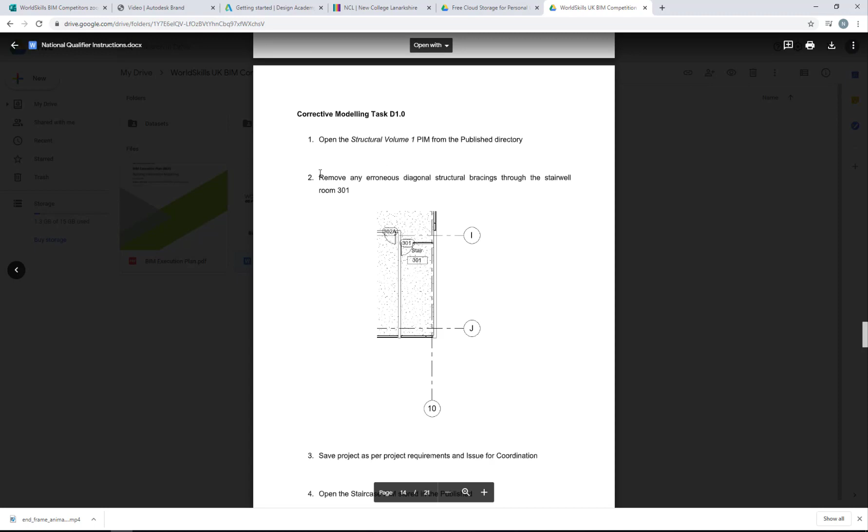In this video, I'll show you how to complete a staircase based on a provided sketch. The corrective modelling task D5 says: delete the staircase and create a new one using the dimensions as per the exhibit below.

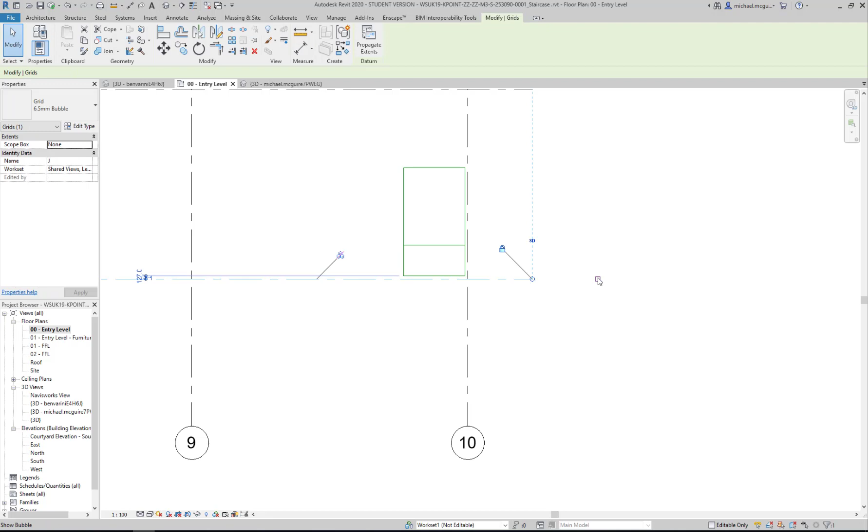Having opened up the model, we can check the grid lines here. Let's switch on the identifier bubble for the grid line. So this is J10, and we can see that in the instructions, at the intersection of grids J10.

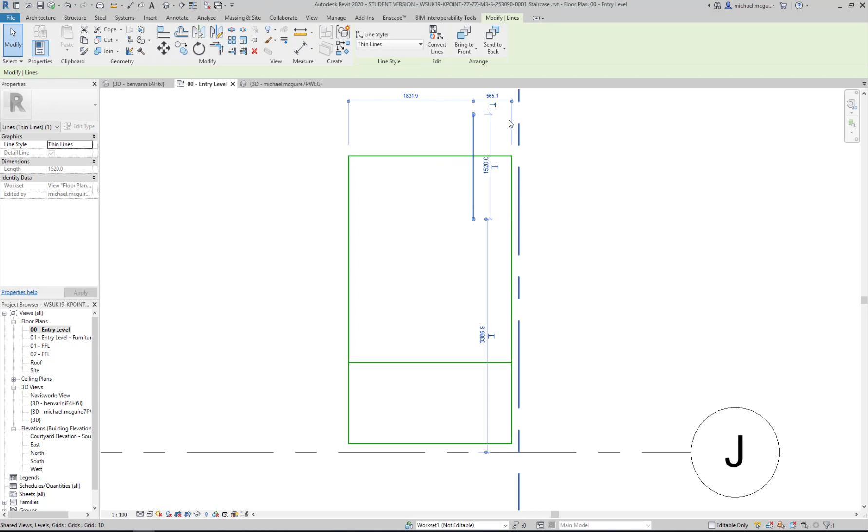I've got a little sketch to create here, and I've already created that using either reference planes or the lines tool. We can say annotate, detail line, and draw in some lines, or use the model line tools. Clicking on that gives us the dimensions out to the grid lines.

One thing we see within Revit quite a lot: if I click this line I've drawn, I can go back to the sketch and see from grid line 10 to that line it's 102 millimeters. If I jump into Revit and click on that, we can edit this dimension here, which would force it to be 102.

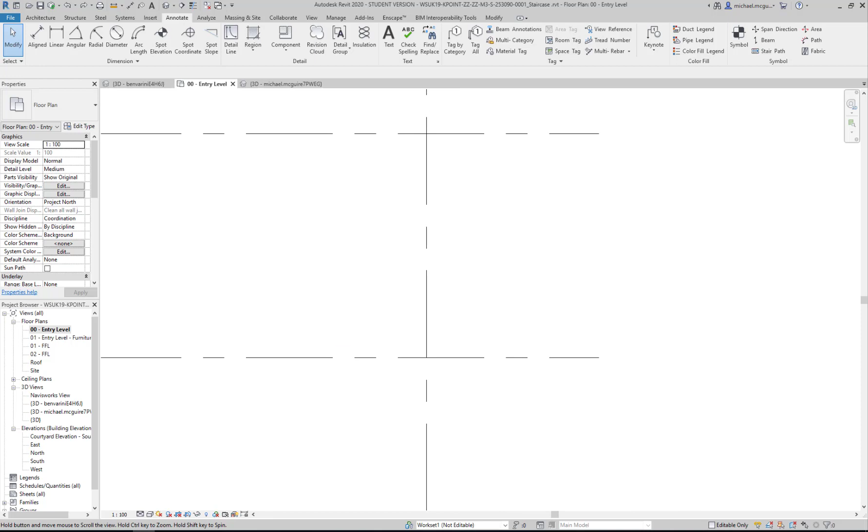But what if we had this line here and wanted to know the dimension out to the grid line? It gives us this vertical line to the next vertical line. If I pan down and click on that, Revit nicely ignores any vertical lines that are out of the screen. So if that were 700 millimeters, for example, we'd be able to dimension to that.

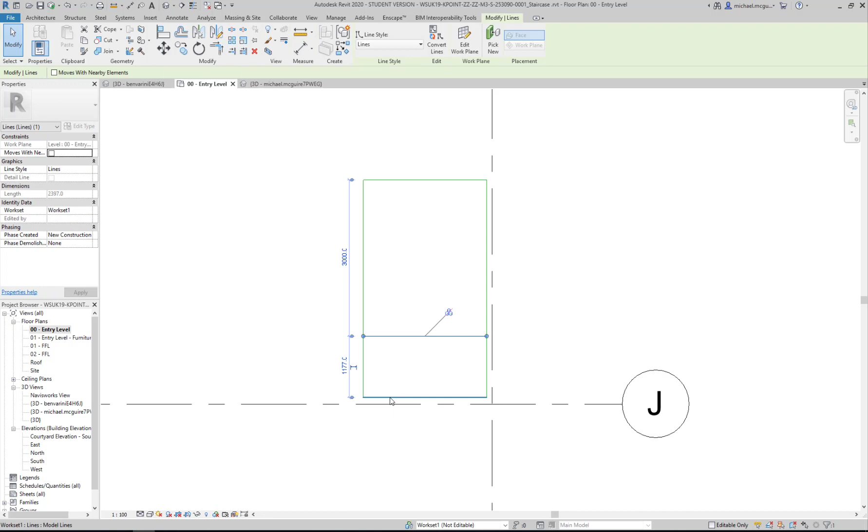Bearing that in mind, that's the kind of tools we use here. So double checking back to that, we'll say that's 1177 from grid line J, this little guideline. I've got that as 1177 millimeters, that's fine.

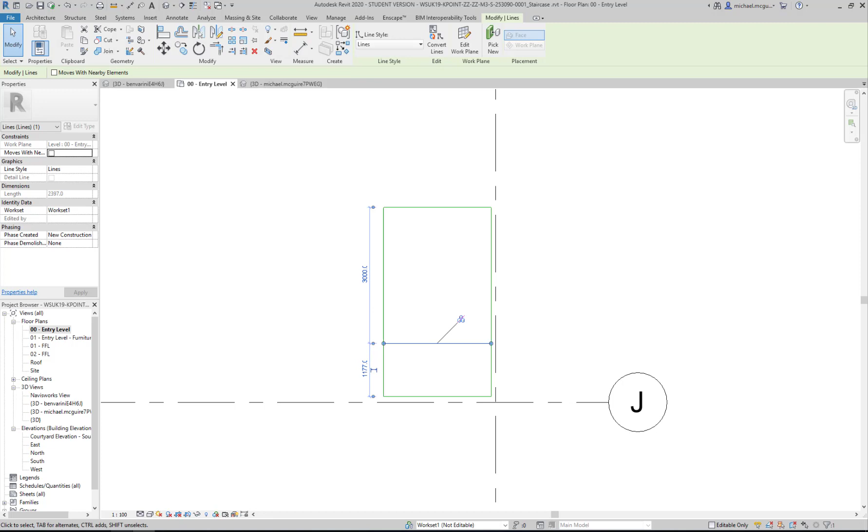If I click here, we can see 3 meters and 1 meter 177, so total length 4 meters 177. Yep, 4 meters 177 with a 3 meter stair run length, and then the rest of that will be a landing. So I've used the sketch to create these little guidelines.

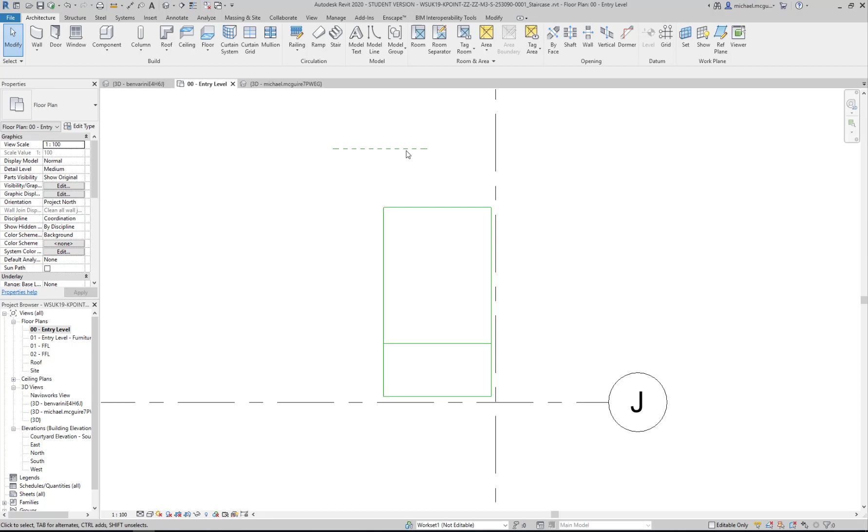Again you can use reference planes for that. If we go up to architecture, there's reference planes, so we could use those instead - same thing, clicking on it and dimensioning it into position.

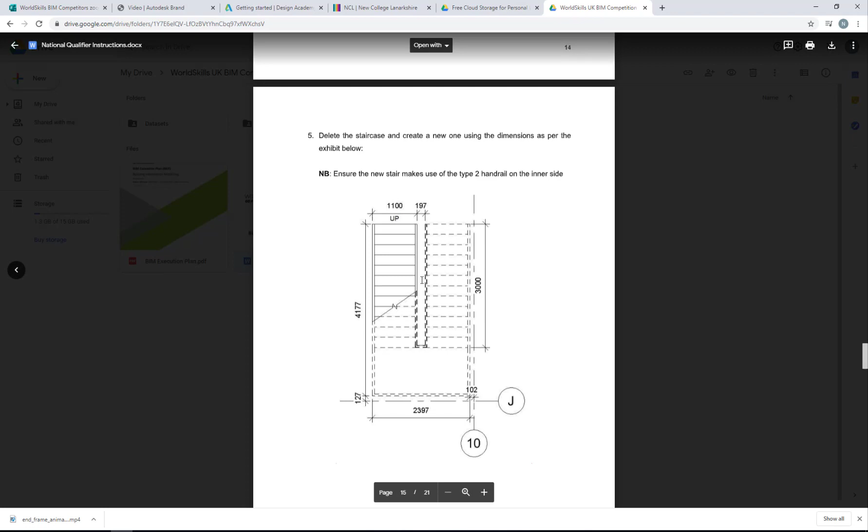One thing that's kind of missing from the task is what type of staircase. It says delete the staircase and create a new one, but doesn't tell us what type it is, so we'll just open the model and keep it set to that type. If I go to stair, we'll just keep it as this type of stair.

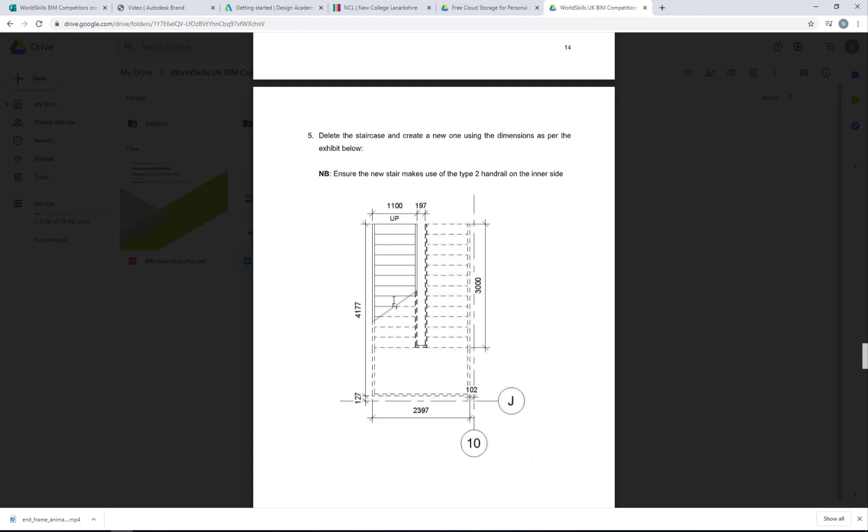Let's come back in and count the number of risers: 1 through 26. So the first thing we need to get right is the desired number of risers - we'll go in and set that to 26.

Next, what's our run width? It's 1100 millimeters, so we can change that also. Again double checking, we're going from 0 up to first floor, for example. We're on exterior support left, which looks right because we've got 102 millimeters to the exterior support left at that point.

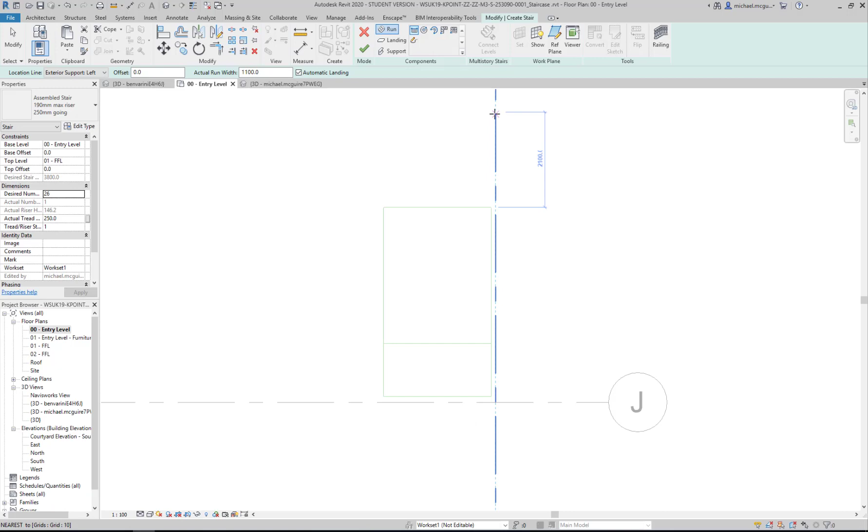Which means obviously when I draw my line, it's going to give me from the outside of the stringer, the support in the way. So let's pick up that first point, coming down here to where the landing starts for the second point, and then look for the next start point for the run to here.

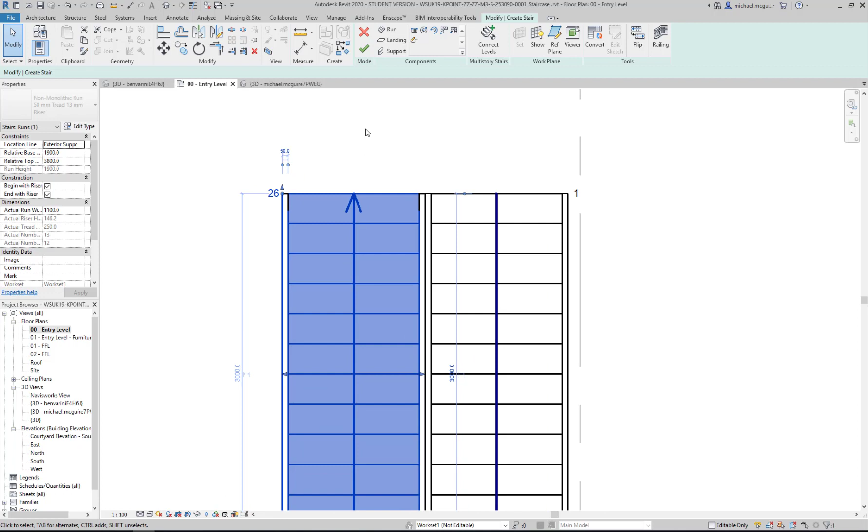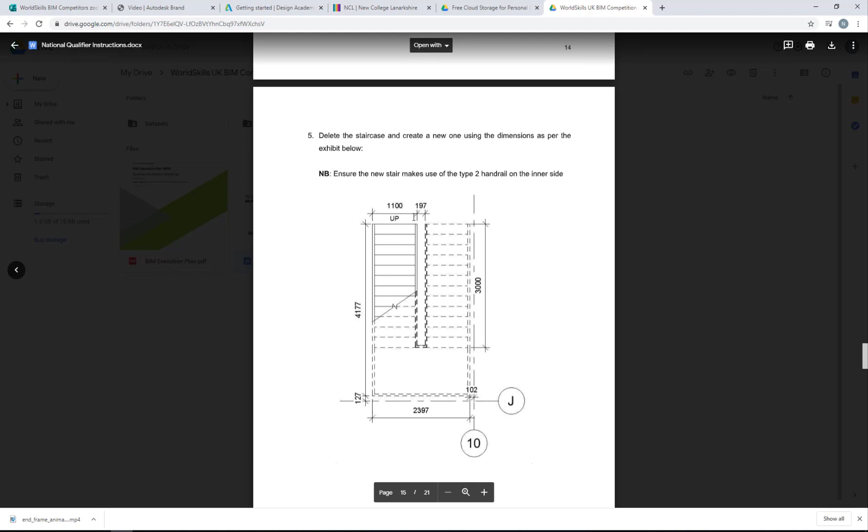Okay, some things to look at then - it looks a little bit off, so we'll say aligned dimension from here to here. How's our 1100 millimeters, which was, if we go back, the outside size with 197 in between.

What we need to know, let's go into annotate aligned. We've got these dimensions here, that's 50 millimeters and another 50 millimeters, so 100 millimeters. We need to take that off of our staircase, so let's cancel this and try again.

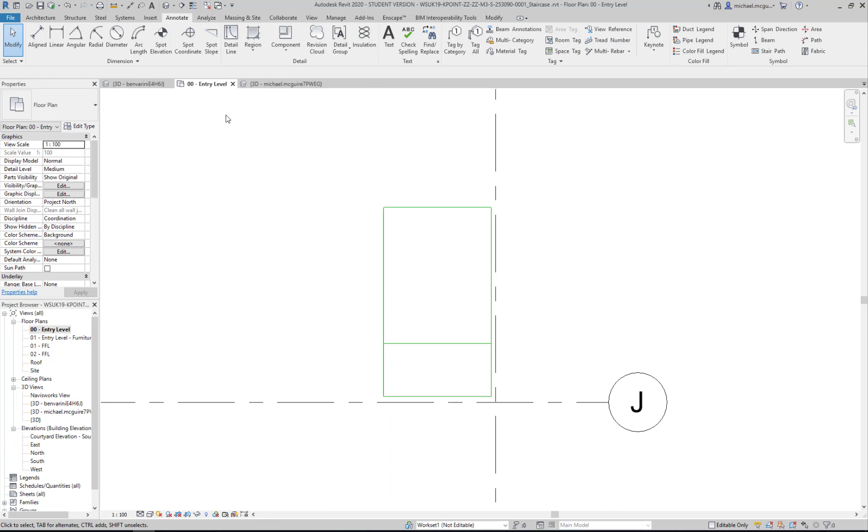So we'll say architecture, stair, and take that 100 millimeters off. This time instead of 1100, we're going to say the actual run width is 1 meter, but again make sure we get 26 in the desired number of risers.

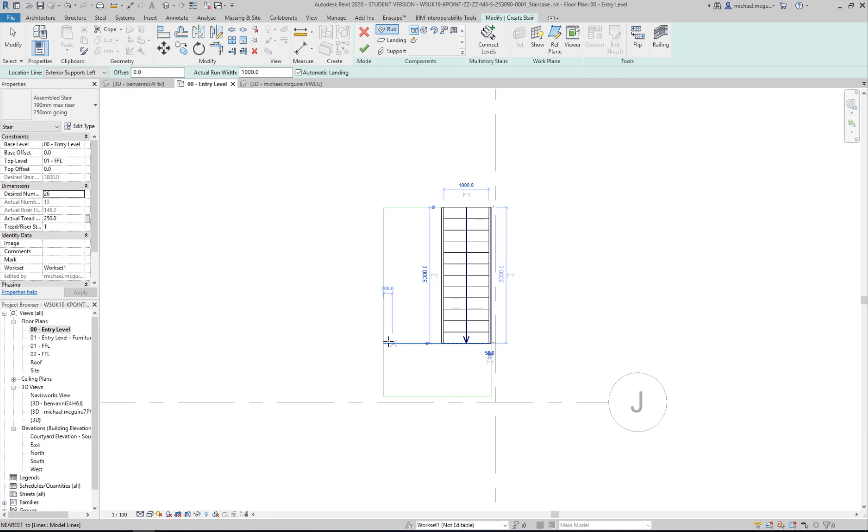Again, I'll click that bottom left start point and up to where the landing takes place, and then back over to the other side of that. There we go. If we say finish to that, we get a couple of things to edit within here, but we can do our dimensions and we'll see that it actually sits at the right dimension into here, but here doesn't.

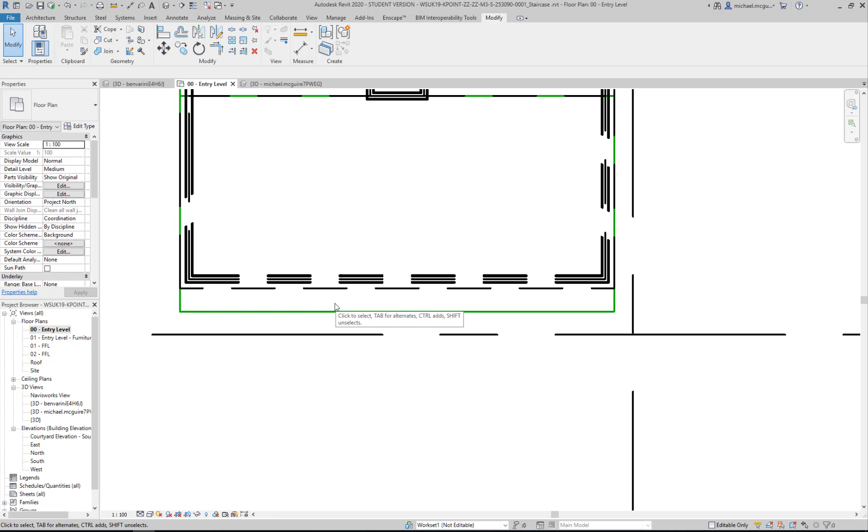We can see the green line is actually showing through, so the staircase obviously doesn't meet that.

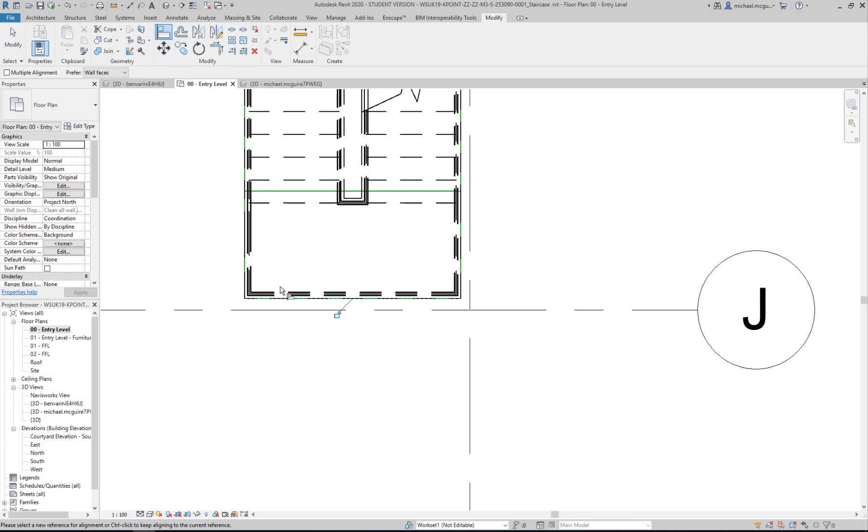Now if we just jump in straight away and say align to that green line - let's align the exterior support, that was the railing - align to that, the exterior support. What it does is bring the whole staircase down, so even trying again to move that back up, it moves the entire staircase.

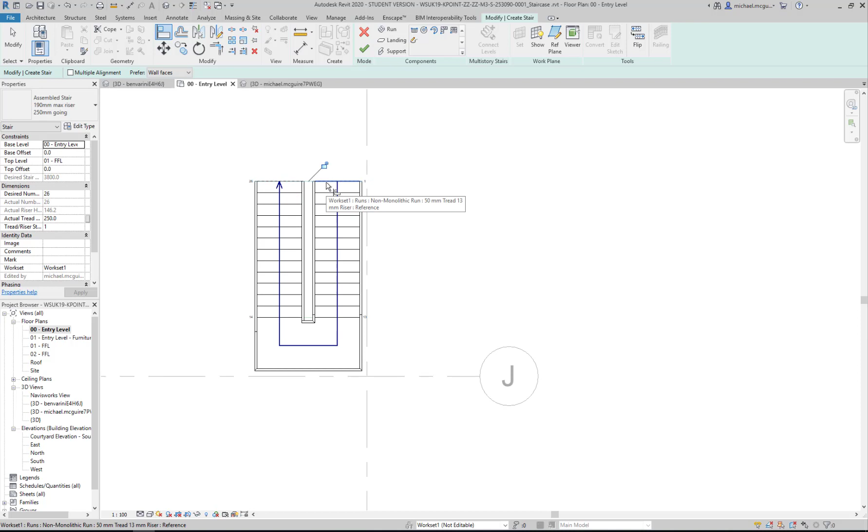So what we have to do is go into edit the stairs. While we're still editing the staircase, we can do the same thing, but everything moves down. This time, we can change where the start and finish of the stair comes back up again, just using the align tool.

If we say finish to that and go into our 3D model, what we're being asked to do is not use that railing on the exterior of the staircase, but change this railing as well. Going back in, it says ensure the new stair makes use of railing type 2 handrail on the inner side. So this is on the inner side of the staircase, and let's use type 2 railing.